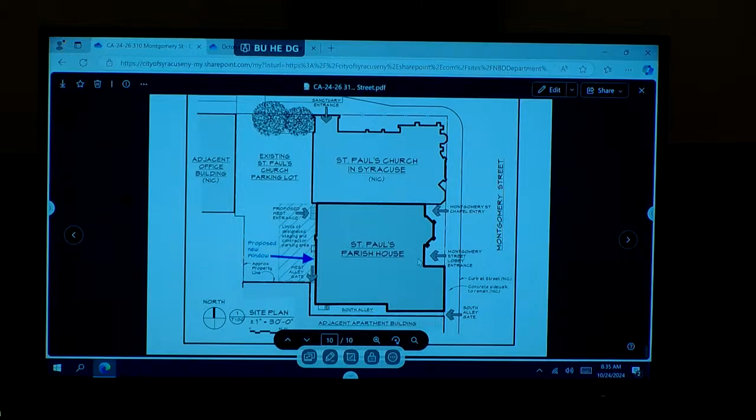Okay, hold on. This is actually good. This is the location of the new window, and behind the window is the church's commercial kitchen for the parish house. The window location is actually between a refrigerator and a sink, and it happens to be the location of a former window. It's a little bit narrower than the former window.

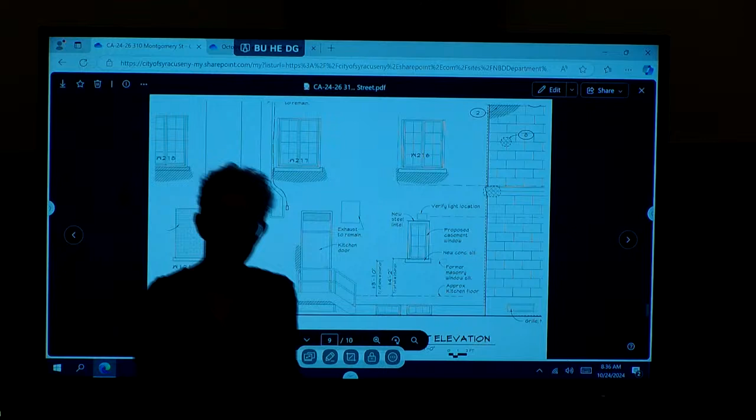So if you could pull up the exterior elevation. It's a single casement, very similar to the upper floors, with the same spacing of simulated divided lights. It's much more of an industrial 1929 facade than it is the fancier parts of the church.

So I can answer any questions. If there are no questions, I'd like to ask anyone who would like to speak in favor to come forward. Tom?

My name is Tom Cantwell. I'm a member of St. Paul's Church, a longtime member, former chairman of the Buildings and Grounds Committee. This project, putting a window back, is based on the fact that there is no natural light in the kitchen, literally. If you close the door, the whole room is as dark as a tomb.

If you look at the photo, there is a leftover windowsill, and that shows where the window was. At this point, there's no one at St. Paul's alive who knows why the window might have been removed. It was done decades ago, so there are no members around who know what happened. So this is first an effort to offer some natural light in the kitchen, because otherwise you can't see anything at night or with the doors closed.

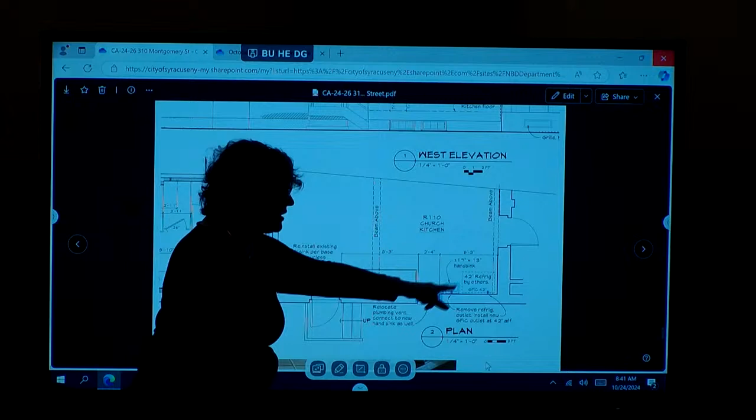Now it's just moving—hold on, it's based on... do you want me to control? It does not look like you can do it. It's tight. There's a vent stack there for the sink, that's why I'm moving it this way. If it can, if it can't, it can't. So depending on the layout—so you really don't have room? There is an existing triple sink here, so we squeezed it as far over. We've got a plumbing vent that we actually have to relocate, we have to relocate electrical, and they don't actually have a hand wash sink.

And are you reusing the brick that's there? When you're opening up, if you preserve that brick that you have—it's actually, it looks like it doesn't match exactly. Are you just saw cutting that opening, or are you selectively removing brick? They'll do brick returns. I think what Julie's asking is, are you taking out a larger section than you need for just this window? No? Okay, they'll put a new lintel in and then do brick return.

We also matched brick because we're doing a new entry—we brought the new entry in, so we have brick to match as well. Okay, which is the left. All right.

May I have a motion unless there's more deliberation? I'll motion to approve the project as submitted. Second? I'll second. Any discussion? All in favor of the motion? Aye. Any opposition? The resolution passes. Thank you. We are done.

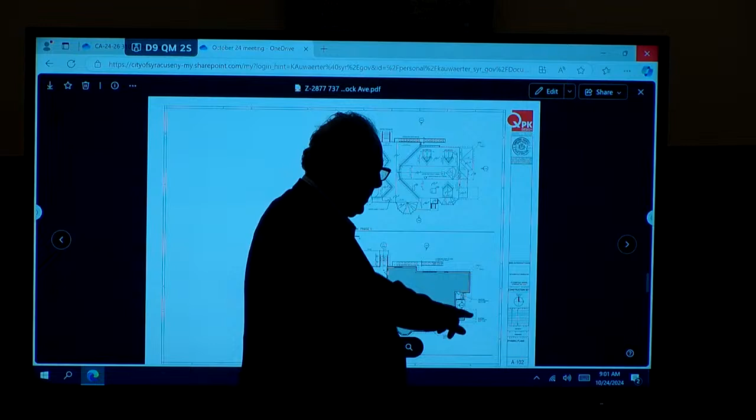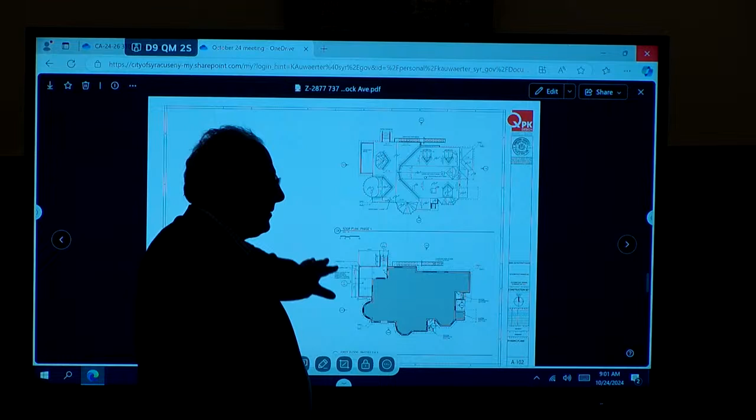That's this little add-on, a non-historic addition that came in over time. It has its challenges. I think they did it to protect the basement. Is there no longer an issue there, or has that been accounted for? No, we're going to remove the siding, repair the concrete, and try to put the envelope back in shape so it continues to offer some level of protection.

We're not talking about removing it. Thank you for the clarification. Correct. Any other comments? Question concerning the roof - as far as the slate, when you guys looked at it, what were the repair costs? You mean as opposed to trying to keep the slate? I think it's well beyond its life. That's not an option. It's also harder to...

I got mine. So our charge is to comment. To comment, and I guess the comment would be - do you have more?

Vince, can you speak to the railing replacement on the front porch? That railing on the front porch is staying, it's the staircase that's deteriorated. You can see it in the lower photograph, third from the left in the drawings - that is getting replaced and a new railing being put on. New railings will match in kind.

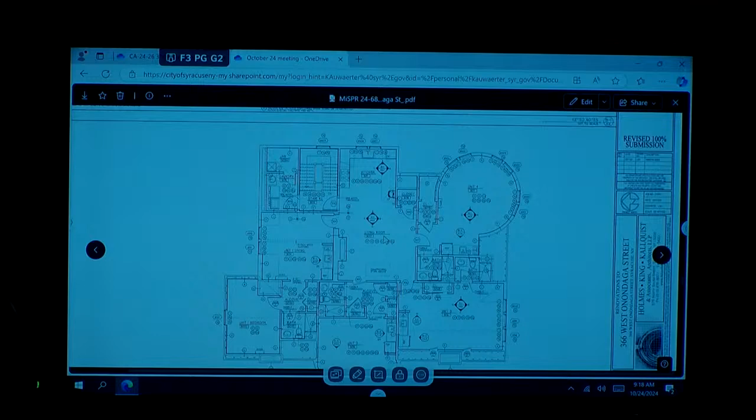Since it has such a significant percentage of central space, as you can see the living room indicated there -- if you can go back to one -- you can see there's a really significant public space where you enter. So the intent, similarly on the second floor, there's a fairly large central space.

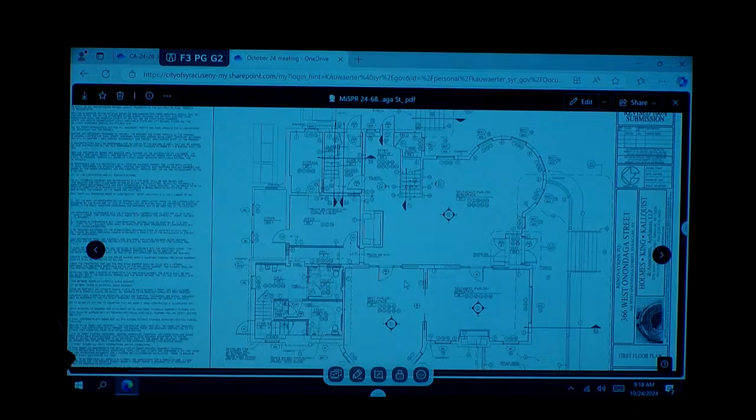My clients intend to have offices on the first and second floor, and the central spaces will be shared service space: secretarial, administrative, et cetera, with perimeter offices. You go to 2.

Similarly, if you go to 3, that will be congregate living. There will be a shared living, dining, kitchen space, and then apartments with small kitchenettes sharing the main living space.

Are you interested in seeing the renderings? Yes. Okay, please. So we'll stick those renderings in.

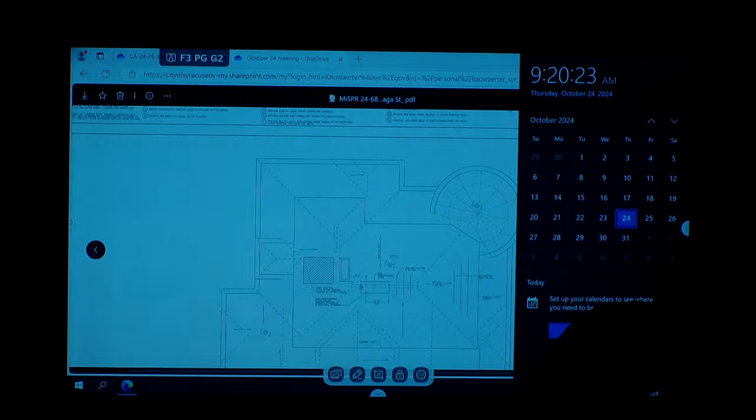So based on this, the colors are to replicate the original colors of the building.

Do you want to come up and introduce yourself? Chris? Morning, everyone, Chris LaBerge. I'm one of the developers. My partner, Luke Esposito, is also here.

From the research we have, and also looking at what exists on the shingles out there, it appears that the original color was predominantly like a brown, kind of burgundy color. But my familiarity with the property my entire life, and most people's, I think, that have been by it, is as a green -- this big green kind of grand dame, like Jamie said.

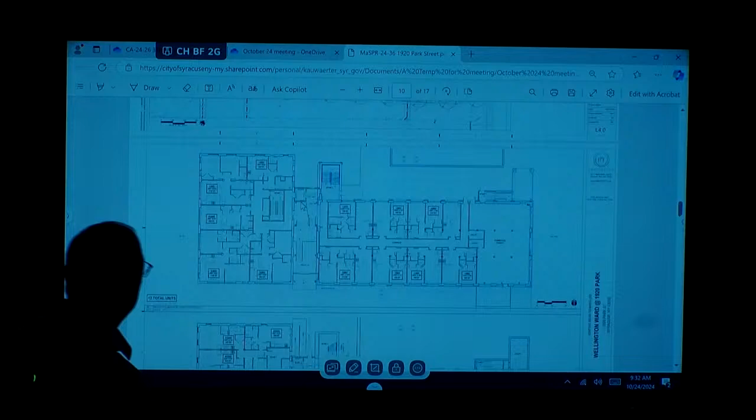Yeah, right there. So the plan is this connector here, because of the different levels. You can see we're going up partially to get up to a level, and then we'll continue up to that next level.

So from the rear of the building, it's accessible? Yes, okay. Yeah, because the tenants will be either parking in the back, or parking in the basement, or there'll be street parking, because we have 59 apartments and 17 spaces on the inside. And then we only have like 11 or so.

So one of the dominant features of this building in the back, on the north side, those two stairs, we're going to maintain those stairs as is. We're going to try to keep all the finishes intact on the inside. It's all concrete, and we're going to maintain those.

So the apartments are laid out with a double-loaded corridor in the 301 building, and the 1920 is a little bit different because it's a different form. We want to replace the existing stair that will go all the way up, and then we'll have a penthouse above that that kind of looks like the existing penthouse that's up there.

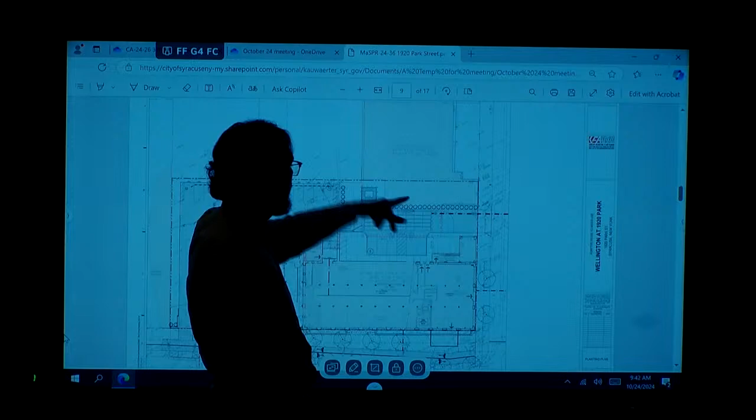So the dashed red line you see here is a one-story masonry building, CMU block. We don't know when it was put on, but obviously much later than the rest of the structure. So that will be removed to make room for the parking lot, etc. In terms of site, as it pertains to the LPB, you've got your transformer.

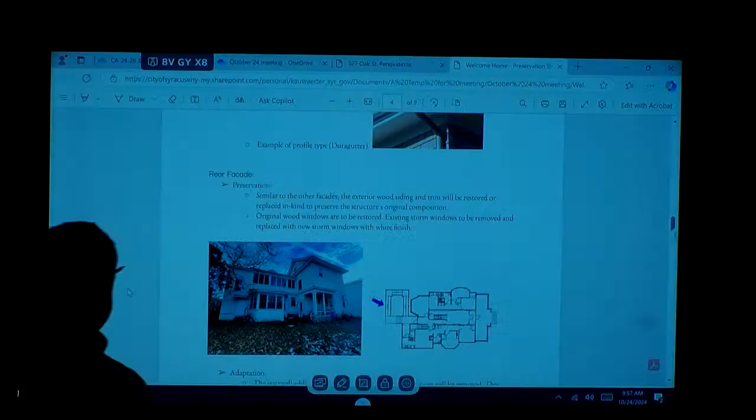There are a few sections in this building that we would like to point out. There is one portion as part of the adaptation of this building - all the adaptation will occur on the back side, away from street facing, not visible in general. There is one section of this house, an addition built maybe 50 years ago, that is falling down - it's basically an interior stair that is out of compliance and in pretty rough shape. So we are proposing that we take that down, restoring the original footprint of the building.

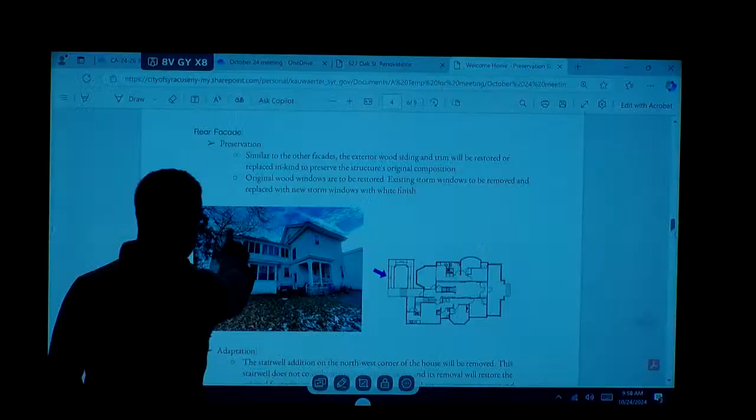So you're proposing to remove it in its entirety? Exactly, right here. Can you show us in plan? Yeah, right here - if you want to go to the plans drawing, it should be the demo. Up, one more.

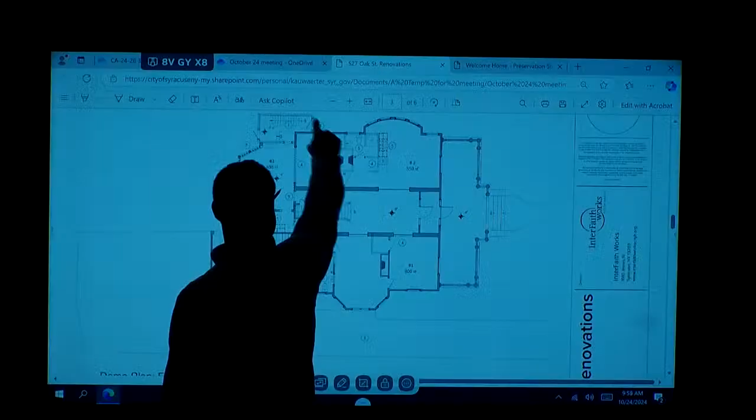And that porch, if that is a porch? The porch remains, that's just window replacement. So this would be the only structural element that really is a volume of space that gets removed from the building.

There is one more removal of building that is perceived from the exteriors I guess I could address. We are planning on taking down two non-prominent chimneys that are non-functional.

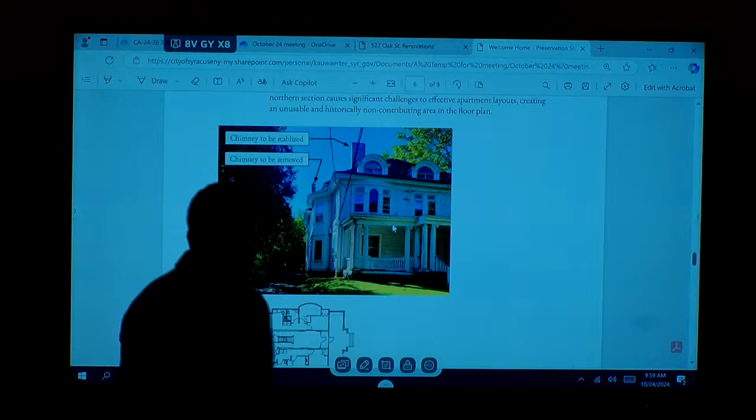If you go to the preservation document and scroll down to this page, we would be planning on maintaining this larger prominent chimney, which would be repointed and fixed. But this one, which is basically a flue that is unused and in very bad condition, we're proposing to take down. There's one other chimney you can't see from the street, from behind, or from anywhere, kind of tucked in on the north side, that we're also planning on removing.

We're doing that for two major reasons. One is for purposes of our planning for the apartments — these two unused chimneys create a barrier for creating floor plans that provide accessibility for the apartments we're proposing on the first floor. The second reason is to decrease the possibility of roof leaking.

We will be adding gutters to this building. If you scroll up on this document, yep, down right there — we will be adding gutters, but we'll try to do it in a historically sensitive fashion. This building initially had the built-in fascia gutters of most historic homes, which have been covered up by the roofing, so we'll try to reestablish that line, remove the old gutters, and put in this colonial profiled gutter that will help with the aesthetics of the building.

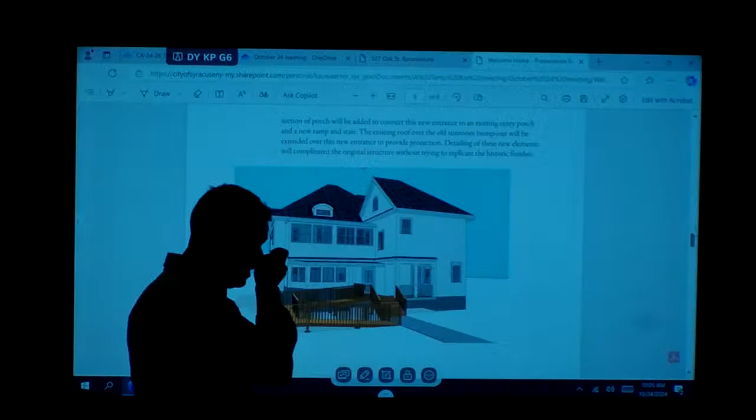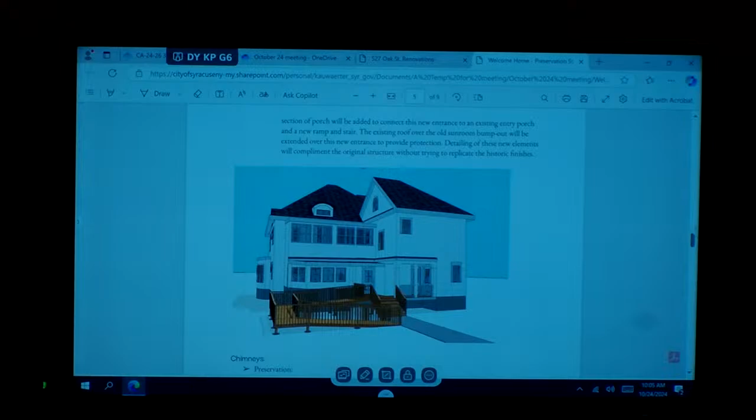Right, so we want to do this as simply as possible, away from the street. If you scroll down—page 5, there you go. Basically what we want to do is create a ramp that gets you up 40 inches, so it's going to be a long ramp. We want to build it out of simple dimensional lumber, and we're not trying to recreate anything historical with that. The only alteration to the building is changing a window into a door and pulling this roof line over, so we really tried to approach this in the most non-invasive way possible.

It just takes up less space. Yeah, we can explore that.

I feel it's a very sympathetic approach to a beleaguered house that needs a lot of love and attention, so it's a great project. Just a few items—again, this is great historic preservation. We're matching wood for wood, we're matching railings. Kudos to the project for rehabilitating that front porch. It's kind of the encapsulation of the structure with those ionic columns—that beautiful, deep, full-width front porch. So very excited to see that.

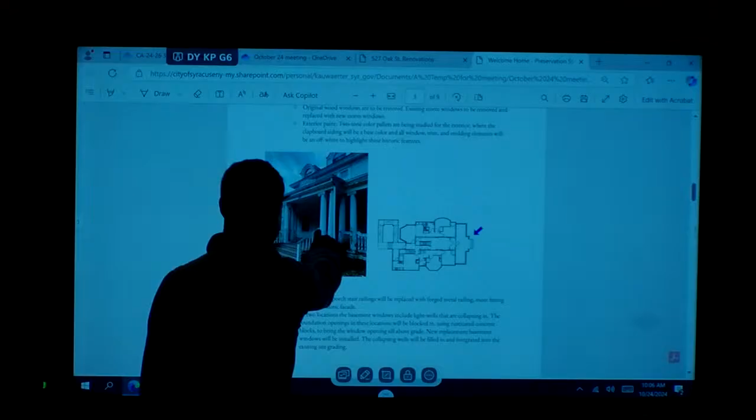Page 3—you say an adaptation of railing. I'm assuming more of a simple pipe rail down the stairs, not the chunky wood stuff we see currently. We're only speaking about that addition, keeping the balustrade on the porch. So that would be a steel or wrought iron approach—galvanized pipe railing.

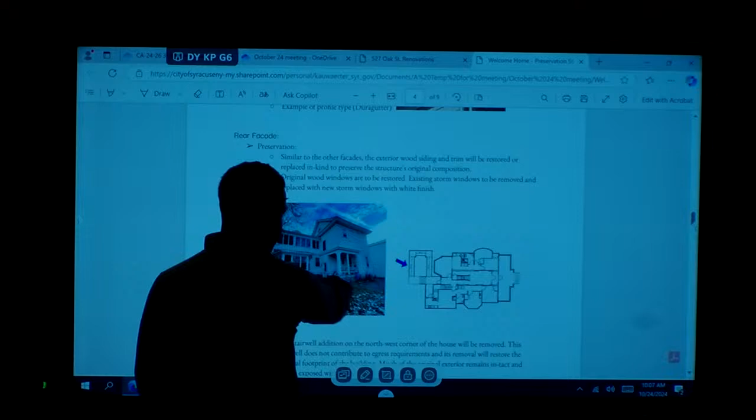Around towards the back, with the new ramp and transitioning a window to a door, we're going to lose the historic opening to the basement door, so we've got plans to address that on the inside. We have basement access because that door goes away, and you have a new ADA compliant door there in the back where you're going to extend the roof. Very sympathetic. There's also access to this stairwell as well as here—this one will go away and get sided over, but the access point remains here, and we're creating a new stair to the basement.

I'm just trying to review all the major exterior changes—sure, just going around the house. That looks great. Chimney removal, spot on—reducing the one, maintaining the other. The other one's out of sight. That's great.

Interior—I know we don't talk too much about the interior, but the language here is you're raising the elevation of the handrail on the historic staircase. Can you talk a little bit about that? It's out of our purview, but sure, you have it in here. So the intent—

Go down a little bit more. Yeah, so this—right now this great historic railing is very beautiful, but it's very low, understood, 27 or 28 inches low. So what we're proposing is basically keeping it intact—we're still working out the details—same profiles, same wood, and then creating rails at the bottom of the balustrade that gets lifted off the floor to make the top of the railing the correct height, because we have the posts that will allow for that railing to move up. So the posts are at the right height that you can do it.